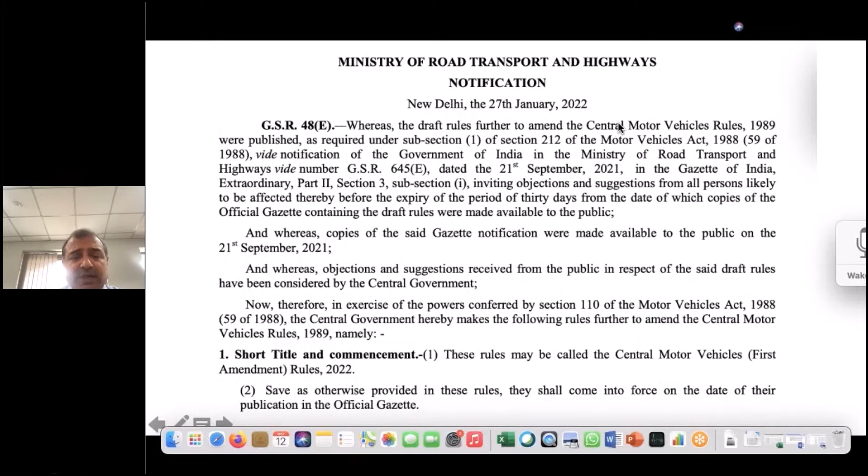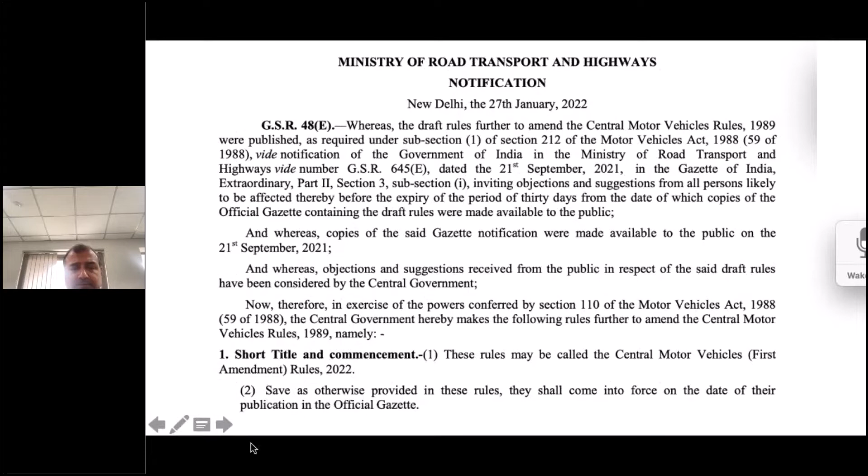So why we are here today is because of this notification, which came in on 27th of January 2022. It is the Gazette notification, an amendment in CMVR rules, known as the CMVR amendment rules 2022. If you read the Gazette notification, paragraph 2A talks about the implementation of AIS 135 in type 3 buses. Similarly, the amendment in rule 2B is with respect to AIS 063, which is basically the school buses.

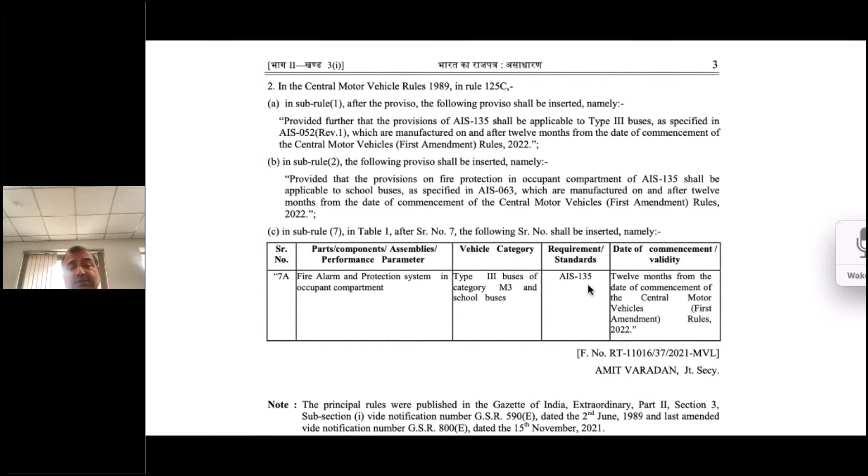And the table makes it amply clear: fire alarm and fire protection system in occupant compartment, type 3 buses of category M3 and school buses. The applicable standard is AIS 135, and the time period given is 12 months, which will be ending in January 2023. So we expect implementation in January 23. That is the current position. How we came to this position and what various aspects we studied.

So on one hand, we should be removing those aspects which impact the buses in their operation, and at the same time, incorporate new measures so that the risk and the hazard is managed. In my presentation I'll be concentrating primarily on buses, and whenever I say occupant compartment, you can also consider it as passenger compartment, because these two terms have been used interchangeably, although the standard uses occupant compartment.

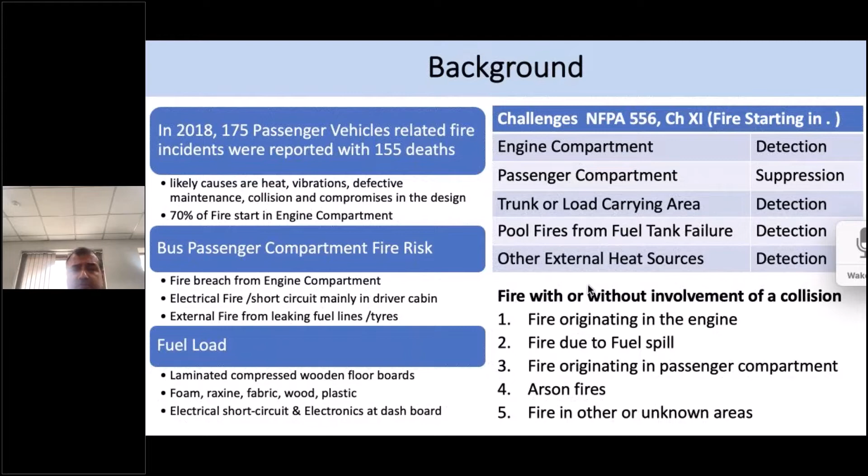Okay, so if you look closely, until 2020, when we started working on this problem, school buses were already slated to introduce FDSS and FDAS: FDAS from 1st April 19, and FDSS from 1st April 20. These two, FDAS and FDSS, were part of AIS 135, which only covered the engine compartment. So the majority of fires originating in the bus were tackled through FDAS and FDSS, and this was implemented in school buses primarily.

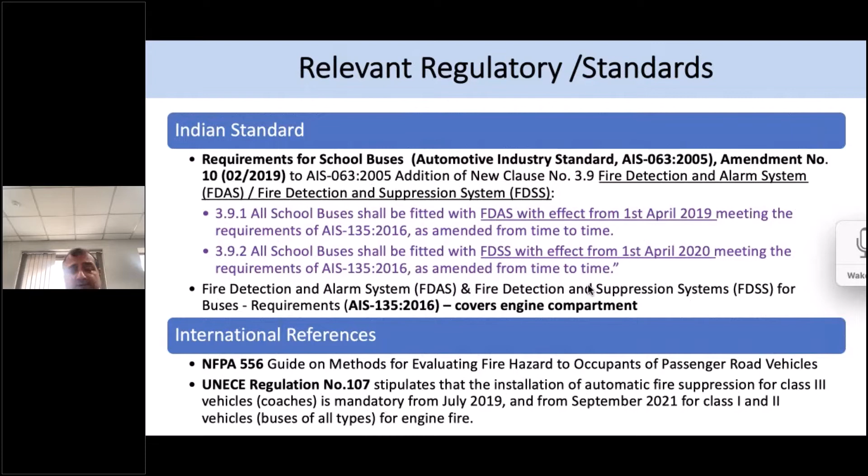If you look at international references, similar guidance can be found in UNECE Regulation 107, which also talks about engine fire. And the guide we referred to for most of our referencing purposes, the guide on methods for evaluating fire hazard to occupants of passenger road vehicles, is NFPA 556. So I would encourage the participants who are interested to look at it and go for more holistic solutions in bus fire.

Okay, so just to tell those who have not been very conversant with fire risk management, there is a passive approach and then there is an active approach. So in the passive approach, we already have a lot of elements in place. There is a firewall between engine and passenger compartment. Then there are restrictions or regulations with regard to the materials which you use, with regard to flame retardancy. And then there is a possibility of using fire blankets. So these are all passive approaches which become part of the complete solution.

So if you look at the progression, the passive approach comes first, then detection, followed by suppression. In that sequence, we still have a lot of work to do on addressing the fire risk in buses using the passive approach. In my understanding, there is still a lot of scope for studies on materials, the choice of materials we pick for the passenger compartment and other fire sensitive areas in a bus.

Then the second line of defense could be our detection system. So the more robust our detection system... and we should always be aware that the passenger compartment is a manned area. So all our efforts should keep that element in mind.

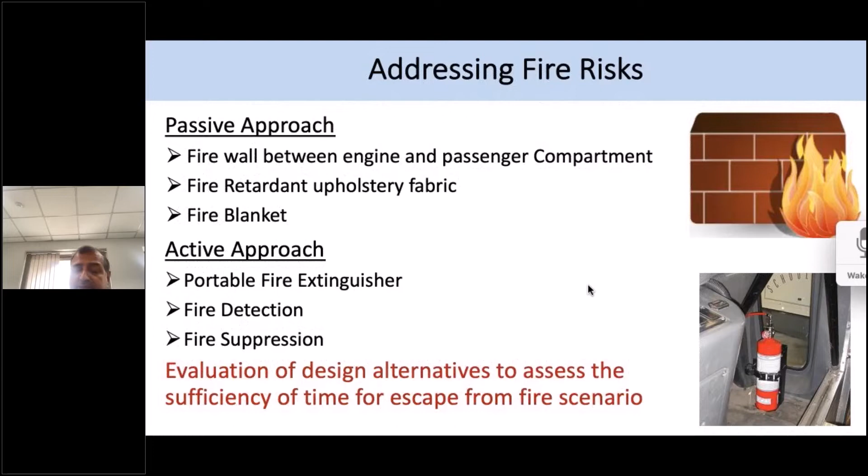A pre-burn time of 60 seconds was given in these experiments, and the temperatures achieved were recorded using thermocouples, and heat flux sensors were also used to measure the heat flux. Both these parameters were compared with the simulation using PyroSim. Subsequent to the passenger compartment fire, we also studied additional external fires from the fuel tank as well as from the braking system.

The system was evaluated and compared, and we found that the system is effective in blocking the entry of fire effluents, smoke and hot gases into the passenger compartment. That is one. The second thing is it immediately lowers the temperature in the passenger compartment, providing a window to the passengers. So it is still effective; although it's not able to suppress the fire if it is externally originated, it is able to provide the window, meeting the objective of the system.

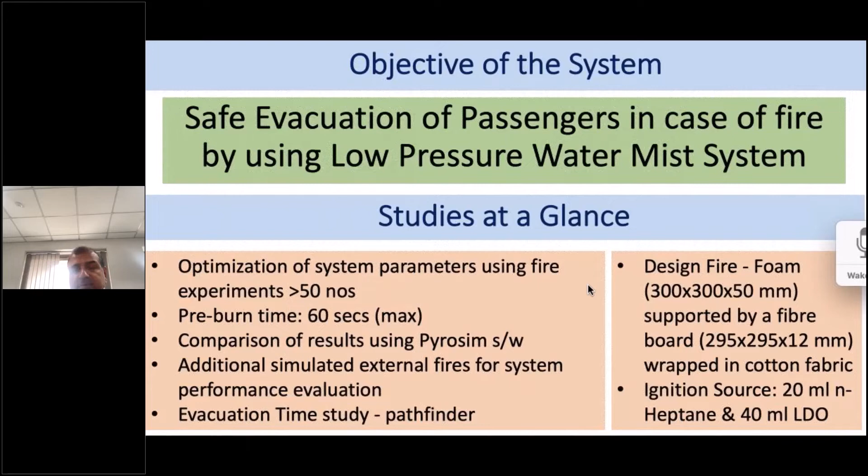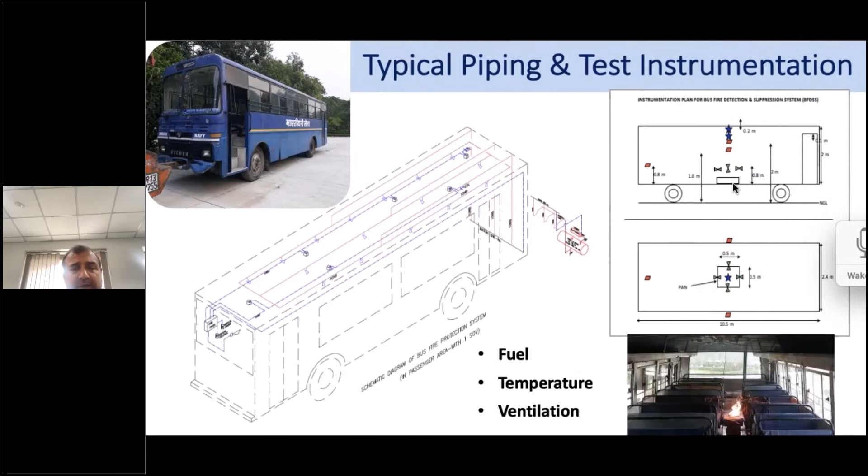But there had been other studies when the fire was created on top of the seats. So there had been different places where the fire was created, and on the left side there is a picture of the bus which was used in these experiments. The same bus was also mapped through a 3D design to PyroSim, where this setup was created. The length, width, and height is of a standard bus.

The seating material involved combustible polymeric mass and cellulosic mass. And you can get an idea that the typical weight of the polymeric combustible is about 40 to 50 kg, weight of cellulosic combustible is 5 to 10 kg, and exposed surface area of combustible was 10 square meters.

There were 3 scenarios of probable fire types generated: passenger compartment fire, engine compartment fire, and external fire, tire fire, and oil tank fire. These scenarios were created to understand the impact of fire and then the impact of mist on the fire, how the smoke layer is getting cooled, how the overall temperature in the compartment is rising over a period of time.

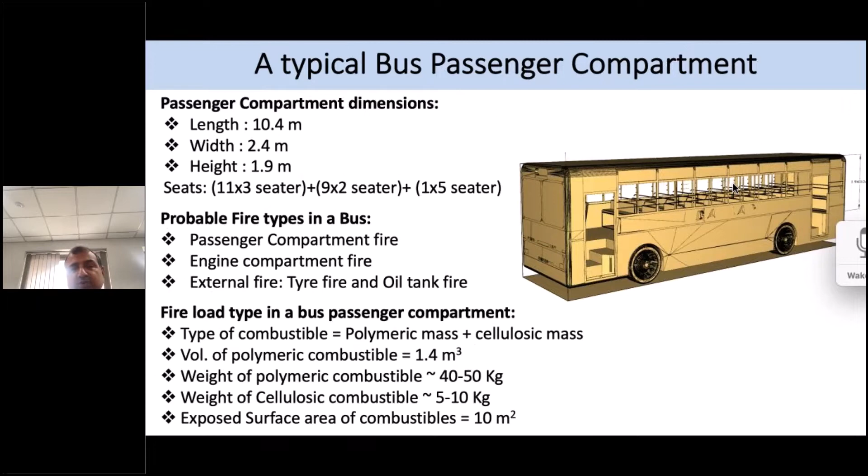So these studies were carried out to come to an understanding that there could be a system that can be used for meeting the objective which we initially set, that is providing an evacuation window in case of a fire, irrespective of the origin of the fire. So that is the brief background.

I'll now quickly move on to the AIS 135 amendment. Once we carried out all the experiments, there had been engagement with the stakeholders from the regulators, the OEMs, the fire safety professionals, and I'm thankful to them for coming on board; that was in 2021. For 6 to 7 months, we were constantly working on this aspect and finalized the other parts.

So AIS 135 was upgraded, or basically additional parts were added to it to cover the passenger compartment, which the standard calls occupant compartment. Part 1 and part 2 were dealing with the engine compartment; part 3 and part 4 have been introduced for the fire alarm system, part 3, and fire protection system, part 4.

I'll quickly go through some of the provisions and test requirements from the standard. Since the standard is voluminous, I will not be able to completely cover the amendment in my presentation. So I would encourage you to look at the amendment itself and go through it. And if you have any queries, then we can discuss it further.

So the amendment was with respect to incorporation of occupant compartment fires. The enhanced scope now includes requirements of fire alarm system for bus occupant compartment, and annexes related to FAS approval, 1A, 3A, 4A, and 6A. Then we have part 4, which is approval of requirements of bus occupant fire protection system, and annexes related to FPS approval, 2A, 3A, 5A, and 7A.

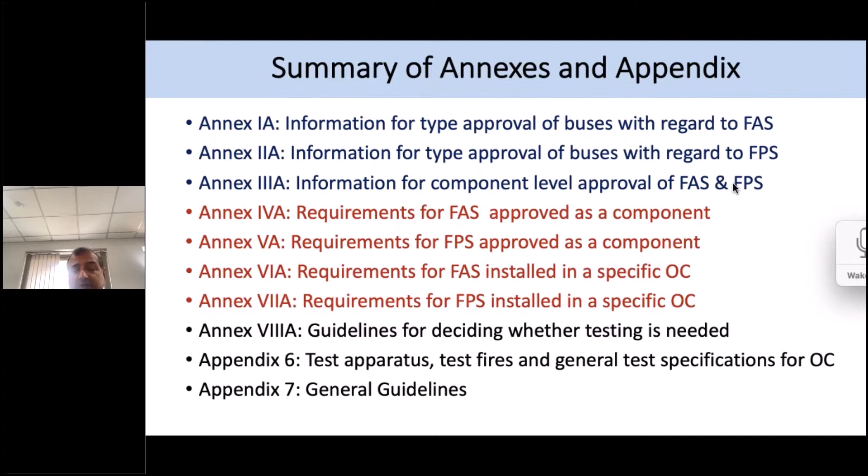So the emphasis on AIS 135 is potential fire hazard. So there is a fire risk assessment which needs to be carried out.

You will agree with me that buses come in various different shapes and sizes, and they also come with different materials which are there inside the occupant compartment. So it is important that we carry out any activity of installation based on the risk assessment, and some indication of risk assessment is given in the standard. The basis for installation of fire alarm system and fire protection system should be based on the fire risk assessment within the occupant compartment to make it effective.

So one clause talks about within the occupant compartment the potential fire hazards to be identified, and the fire detectors shall be positioned appropriately to cover the fire hazard.

So if you look at the fire detectors, we have a choice of fire detectors. In our study we used smoke detectors, but when we discussed with other stakeholders, although we also used heat detectors and linear thermal detectors, we realized that the trigger time for all these detectors other than the smoke detector was very high. So although the technology is very simple, it is prone to a lot of false alarms.

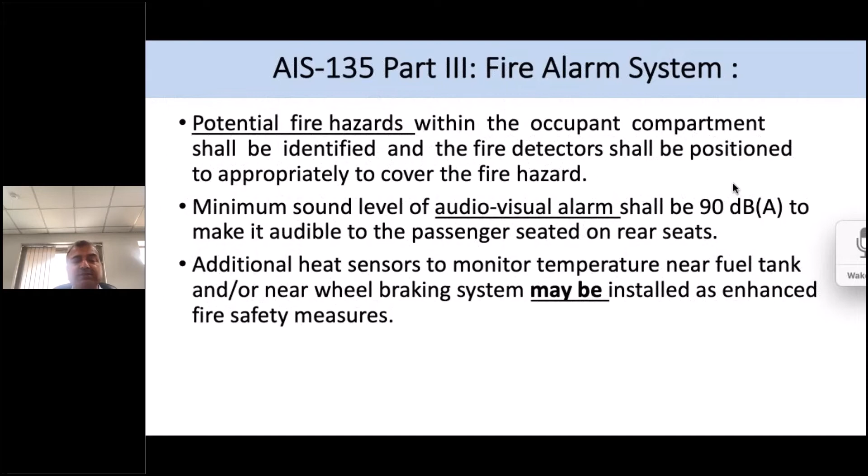Many times if the fire remains undetected and is away from the passenger compartment, it becomes large enough to be noticed either by passersby or by the occupants. To eliminate that possibility and get the detection as early as possible, these provisions are possible, but this is not a mandatory requirement. These are additional requirements suggested to increase the fire safety in the bus.

If you look at annex components, the fire shall be detected and warning signal shall be activated within 30 seconds after ignition of the test fire 8. Test fire 8 is very similar to the fire we used in our experiments, which involved the fiber board, the foam, and the cotton wrap with the LDO and heptane. The same fire has been described, and the effort of the team involved in the standard making was to make it cohesively gel with the FDSS and FDAS provisions.

These requirements are from the perspective of smoke detectors, but these can be altered if different kinds of detectors are being used.

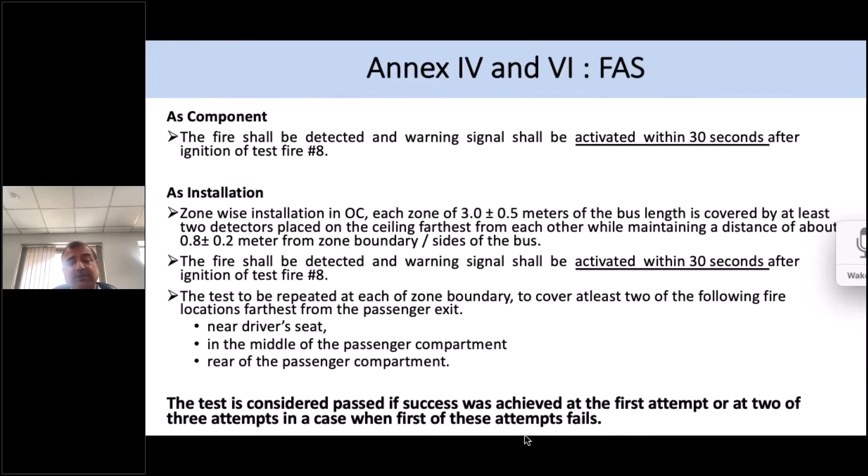The time for activation remains the same, 30 seconds, and the test is to be repeated at each zone boundary to cover at least 2 of the following fire locations farthest from the passenger exit: near the driver seat, in the middle of the passenger compartment, or rear of the passenger compartment. These scenarios are to cover maximum coverage of detectors. The test is considered passed if success was achieved in the first attempt, or at least two of three attempts. So if the first attempt fails but the next two pass, the test is considered passed. This is the provision for the fire alarm system.

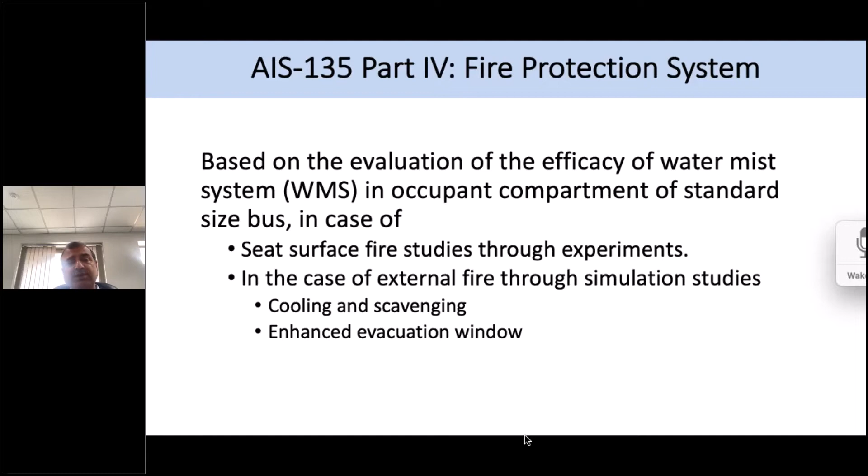If you look at part 4, as I told you earlier, based on the evaluation of efficacy of water mist system in the occupant compartment of a standard size bus, in case of seat fire these studies were carried out through experiments, and in case of external fire through simulation studies, which led to cooling and scavenging of gases and enhanced evacuation window. So part 4 was formulated on this basis, and the provisions are made such that the design details are already incorporated in the standard.

So to a large extent, the effort is not required to carry out a lot of calculations, but there are engineering aspects which need to be tackled. If you look at it, it also starts with documentation of fire risk in the occupant compartment. There can be a single fire risk assessment study of a bus, based on which the alarm system as well as the fire protection system can be configured, and enough flexibility is there in the standard to incorporate these aspects.

So if you look at the documentation, it must cater for the total quantity of class A fire source which is there and how it is spread out in the compartment. If it is studied carefully along with the heat source, then there is a higher probability that we will be able to achieve the objective of evacuation. The identification of surfaces where temperature may reach above 80 degrees.

So in normal operation, if there is no fire protection system, temperatures near the engine due to auto ignition of various gases can reach more than 80 degrees, or there can be gases or substances in contact with the surfaces. So the barrier between the engine and occupant compartment, or junction boxes, or locations with a lot of electrical connections or joints with high voltage and high current, or hoses and containers with flammable liquids beneath the bus, or a possibility of pressurized gas.

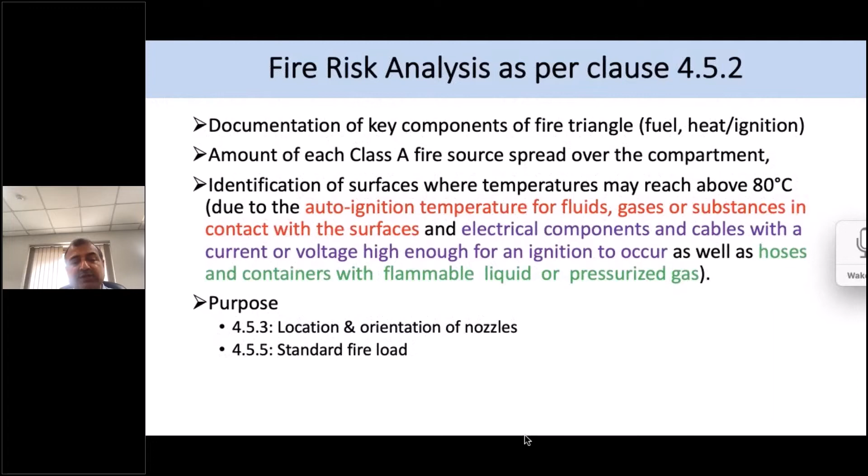Sometimes we find that. If you look at design clause 4.5.5, ease of implementation and reduced ambiguity was the objective. The design basis of FPS for the water mist system was 0.65 liters per minute per meter cube mist injection rate, which is the total aggregate mist injection rate from all the nozzles. The seating capacity has been used as an indication of standard fire load.

So when we were formulating this standard, there was a discussion on whether we can use it for all buses. We realized there is a definite fire load beyond which this will not be very effective and may not be of use, so there has to be further studies on those cases. So a standard fire load, then a seating capacity versus a volume - there may be coaches with fewer seats but the same volume. That will not be covered in this particular standard.

So the table for gross volume range and number of nozzles is more prescriptive in nature, 9 to 35 with enough flexibility, with water quantity ranging from 55 liters to 210 liters.

I'll be talking about that in a subsequent slide.

Volume up to 80 meter cube was subdivided into 7 ranges, and the gross volume range of the OC shall be arrived at without subtracting the volume of installed components, seats, etc. from it. The design features are applicable to the standard bus of volume and seat matrix up to 80 meter cube. Buses having special comfort arrangements or sub-compartments in occupant area shall be subject to simulated fire test as per Appendix 6.

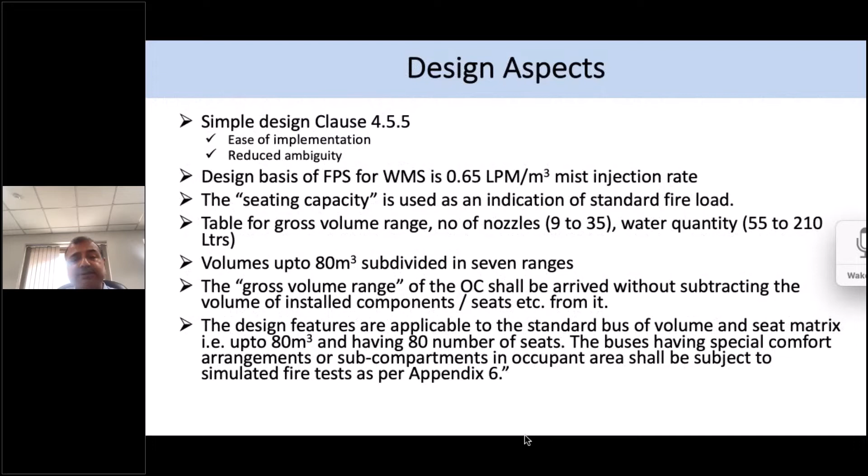This primarily gives a way out to handle those scenarios. It suggests going for a simulated fire test, but there could be further discussion needed as cases evolve or as we have the case in hand. So this is clause 4.5.5.

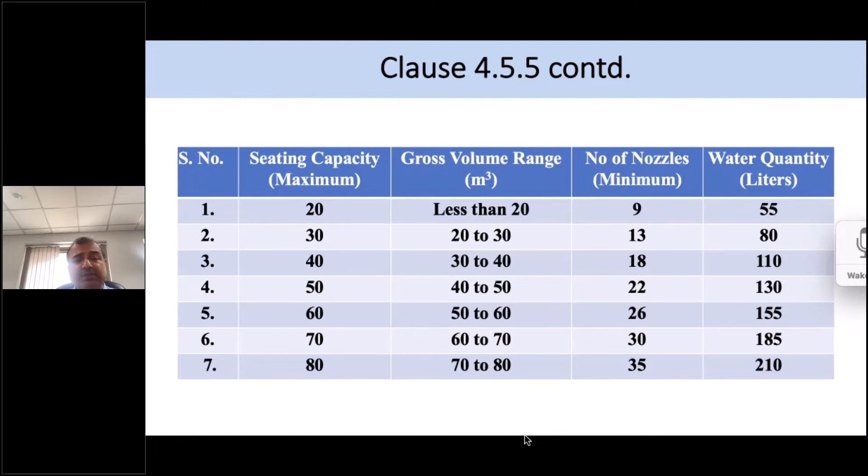It talks about seating capacity, gross volume range, the number of nozzles, and the water quantity. If we use this table, we will be able to achieve the requirement of 0.65 liters per minute per meter cube, which is the mist injection rate that the design basis allows us to achieve. But if we look at this table, if we are talking about a seating or sleeping capacity of 30, and a volume of maybe 50 meter cube, then this standard is definitely not applicable.

Clause 4.5.6 and 4.5.7 talk about the propellant air. The pressure of the air at the discharge point should be enough to create 8 plus minus 1 bar with the water in the pipeline, and nozzle characteristics have been determined at 7 bar. These are the nozzle characteristics, and there is enough flexibility.

With the droplet sizes as well as the cone angle and the nozzle flow rates, this becomes more performance-based than a fixed standard.

In the nozzle spacing, there is a recommendation. The total discharge time should not be less than 3 minutes. This is an area I'll talk about in testing, so this will be part of it.

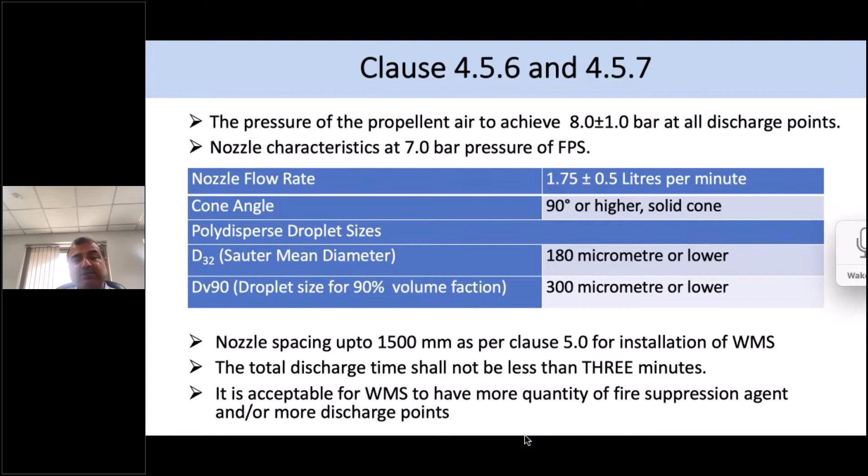It is acceptable for a water mist system to have more quantity of fire suppression agent and more discharge points. Again, there is a possibility of risk assessment or adjusting these elements, but it should be based on a fire risk assessment of the bus, and should not be blindly more or less. Otherwise, it should stick to the requirement of the standard.

Installation requirements: discharge points along the length of the bus should angle downwards to provide wet coverage to the window and seats located just below. All these points are guidelines for installation, and the objective is that the water mist is uniformly spread in the total compartment.

The material of construction should be SS 304 or better, because we are dealing with water, and if the water stays for long, there could be a possibility of corrosion and maybe leakages, so system reliability will be at stake. We consider SS 304 or better if there are better options available.

This should be explored in 3 different headers. When we experimented, we tried 2 headers and 3 headers, and we realized that the 3-header configuration is the best, primarily because of the curvature or nature of the roof of the bus. There is a mid section which extends beyond the side sections, and because of that there is a requirement to have a mid section to cool down the smoke layer which may accumulate in the passenger compartment.

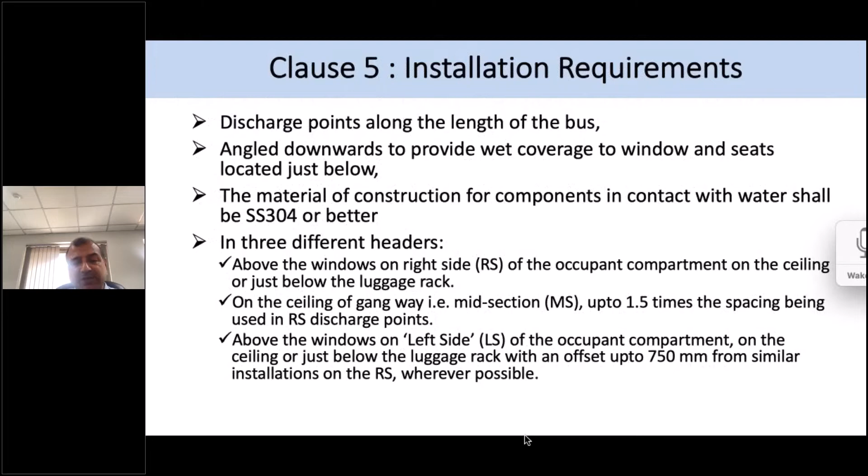The 3 different headers and some spacing-related details are also given, but these are recommendatory, not specific that we should stick to. This depends upon the length of the bus and the geometry and details inside the bus. We can work on this aspect along with the fire risk assessment. We must always keep fire risk assessment as the basis for any alteration from the standard.

If we go for the standard design and a standard bus with a given seating capacity, the standard specifies nozzles on the right side, middle section, and left side, and the network should be installed in such a way that there is no accumulation when it is not functional. The pipe work should be hydrostatically tested and performance documented for review by the approval agency.

This is again one of the elements of testing the system: hydrostatic testing.

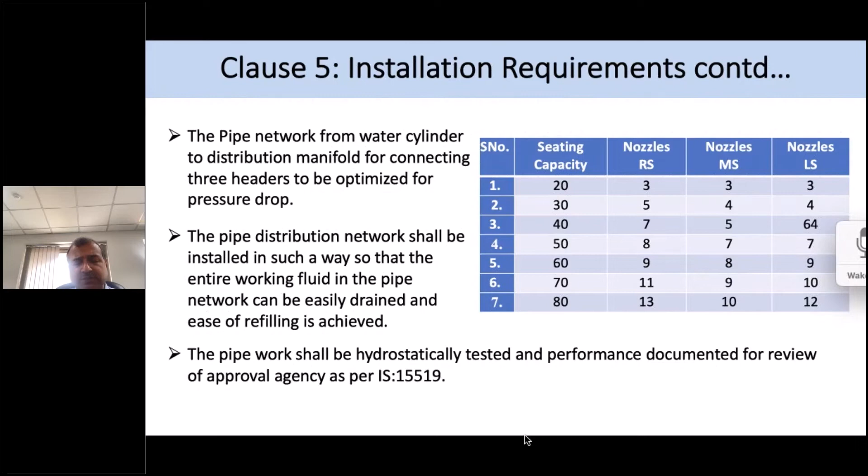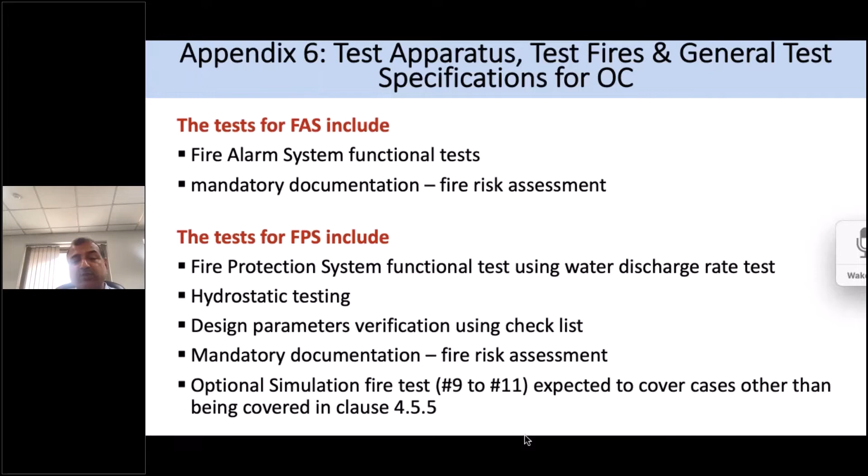The test for fire protection system include fire protection system functional test using water discharge rate test, hydrostatic testing, design parameter verification using checklist, mandatory documentation, which is fire risk assessment again from the perspective of FPS, and then there is one from the perspective of fire alarm system. An optional simulation fire test 9 to 11 expected to cover cases other than being covered in clause 4.5.5. So this is the checklist which we finalized in the standard.

So air quantity, what should be the criteria? Air cylinder capacity. So then what should be the test pressure? 1.5 times of the operational pressure. Then pressure reducing valve, how it should be able to reduce the pressure from the air cylinder to the desired pressure in the water tank, water cylinder.

Then solenoid valve, so that it can be remotely operated from the driver's cabin, and then water cylinder capacity, pressure, test pressure, nozzle characteristics we already talked about, which included flow rate, Sauter mean diameter, and the Dv90. Then total nozzle layout, again it refers to the clause.

Pipe network pressure optimization. Again, this is a very important aspect, that when we work on a piping network, we should be able to optimize the pressure in such a way that the minimum pressure of 7 bar is achievable at the nozzle, or 8 plus minus 1 bar is achievable at all points. Pipe and fitting materials and types, relevant standards.

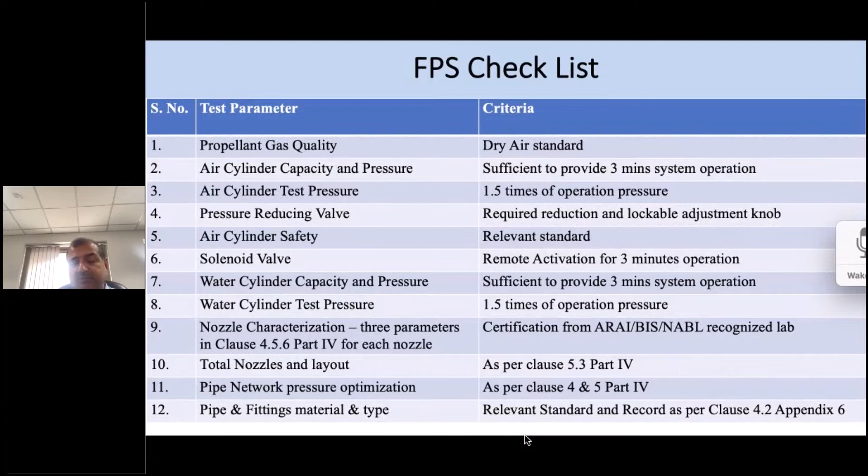So there is an IS standard for the water mist system, and all the other relevant aspects should be picked up from there. General guidelines we talked about in the standard. Component selection. So how do we select a component so that it is reliable? Then documentation. What kind of operational documentation, maintenance documentation, FAQs we should have for the system. Maintenance requirements.

Different kinds of maintenance. The maintenance when system is not operated, but from time to time. So these are periodic maintenance. Then there are breakdown maintenance. So it mentions all these elements. And you must be aware that this is my last line of safety.

If you look at the passenger compartment, this is a manned area which I already talked about, and then there are onboard fire extinguishers, portable fire extinguishers available. So any sophisticated system will not work if the people who are operating it are not aware about it. So the first line of defense is basically their extinguishers, where in any case of alarm they should be able to handle and suppress the fire at its earliest stage, possibly at the incipient stage, but as soon as possible.

And then subsequently, if the fire goes out of hand, there is a requirement to lower down the temperature, then the system should be operated. So this definitely requires involvement of the drivers and the co-drivers at large for making it effective. So a special emphasis, in my view, should be given on this aspect, so that this system remains functional during the lifetime of the bus, and the upkeep and maintenance is done in a timely fashion.

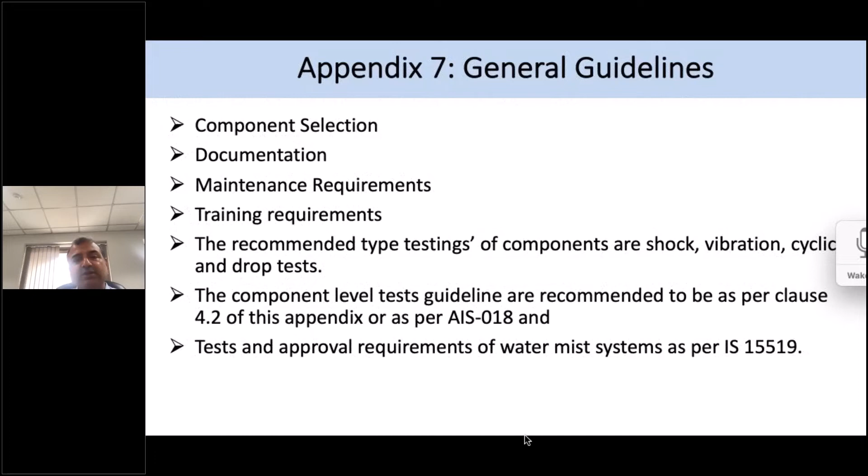So this is the gist of the standard. I did not cover everything due to lack of time because it's an extensive standard. So I covered the salient part of the standard. And you must be aware that this is one step towards a performance-based system. So I do not see that this is the end of the work in this area, and I hope and expect that the other agencies will also join in and work on this further.

We did simply, and there is a need for further work on this, that we have established fire safety goals and objectives for bus, and then we analyze the fire scenarios, and these scenarios can be more realistic if we have data from the ground. So as we were talking about earlier in the slide, for 2018 data that comes from the Crime Record Bureau, this information can hardly be used because the origin of fire and other details are not available. So if there is data collection on this aspect, there can be more realistic studies and prioritization

of activities. Then quantitative assessment of design alternatives against the fire safety goals and objectives using accepted engineering tools, methodologies, and performance criteria. And engineering tools also involve the simulation tools which we have. Then analysis and design process will involve fire growth modeling and testing of final designs, fire hazard control, and fire properties of materials.

So this is another area I would like to emphasize, which is the last point about the materials. As of date, at least I am not aware of a comprehensive tracking of these materials for their heat release rate, ignitability, and if there are norms, those are loosely bound. So we might like to look at this aspect more closely, so that we have our first line related to materials, the second line which is fire extinguishers, and third is the fire protection system. So in that aspect we can give higher priority to quantify and have reasonable targets for fire properties of materials.

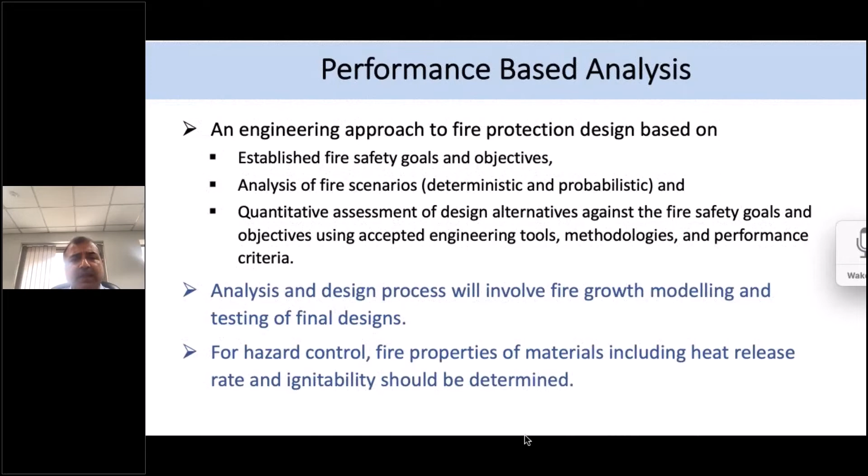And in conclusion, I will say that fire protection system complements fire extinguishers and passive fire protection measures. I have been repeating this part several times, and I expect that if there's one takeaway, it should be that fire protection system is complementary to fire extinguishers which are already there, and the passive protection measures which you have already incorporated. FPS enhances the evacuation window for the passenger, irrespective of where the fire is originating. Selection of reliable components needs to be addressed for implementation, and priority to bring out test protocols for FPS and FAS, so that there is more engagement of the industry on this element.

For the research institutions and other organizations, what could be the way ahead? Further studies on performance-based design approaches, which I talked about in the previous slide, industry participation for component-level reliability assessment, and addressing fire safety in vehicles with different types of fuels. We must be mindful that now there are different kinds of fuels being talked about, be it hydrogen, a mixture, liquid hydrogen, EVs, so there are a variety of fuels which we will be encountering in future. So how we can comprehensively deal with fire safety needs to be looked into.

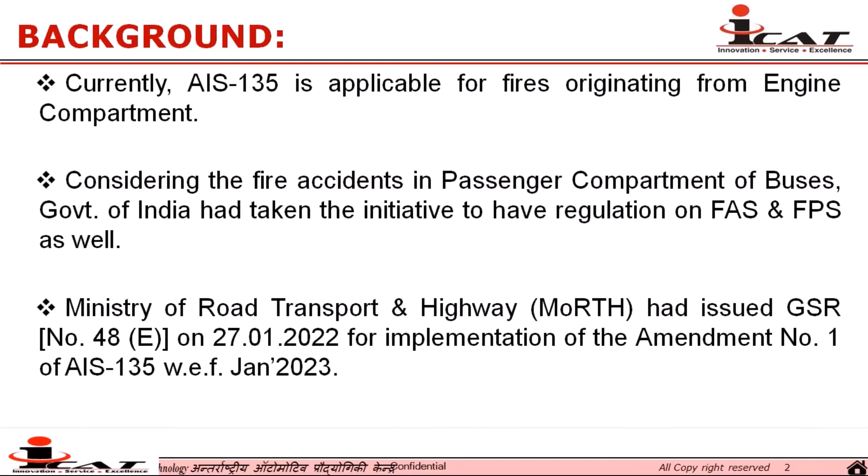Currently, AIS 135 is applicable for fires originating from the engine compartment. In this standard, there are two types of testing, FDAS and FDSS, which are conducted on a mock-up of the engine compartment for fire originating from the engine compartment. However, there are incidences where the source of fire is not the engine compartment. It is inside the passenger cabin due to a short circuit or some external sources. So, to detect or suppress this fire, there is currently no provision in terms of detection or protection.

So, considering the fire incidences in the passenger compartment of buses, the Government of India took the initiative to have regulation on FAS and FPS as well. In this regard, the Ministry of Road Transport and Highways issued GSR number 48 on 27 January 2022 for implementation of amendment number 1 to AIS 135, which will be effective from January 2023.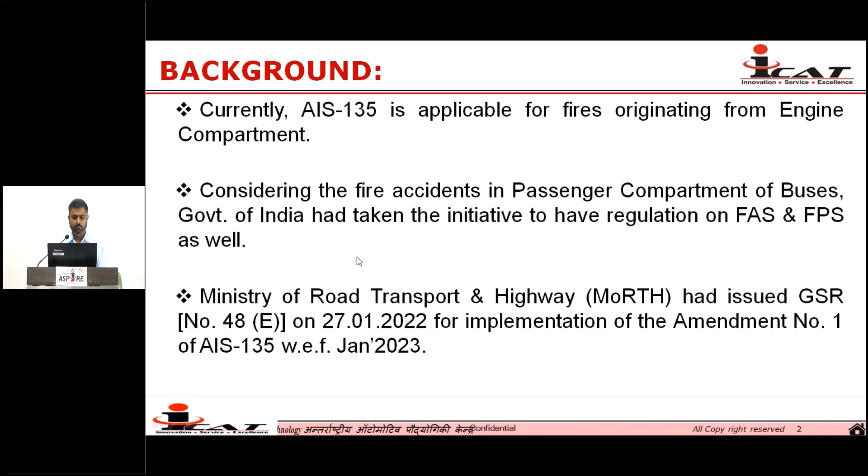So, you can see that these are the incidents of bus fire. This is the recent incident in Maharashtra's Nashik, where a bus caught fire. This incident is recent, on 8th of October. In this incident, a bus coming from Yavatmal to Mumbai collided with a truck which was going to Pune from Nashik earlier.

When I was preparing this PPT on Saturday, I got this information from the news that this bus caught fire in Maharashtra, so I have included this in this PPT. The main source of this fire was external in this case, due to the collision with a truck. In this incident, there are 12 casualties and 38 were injured.

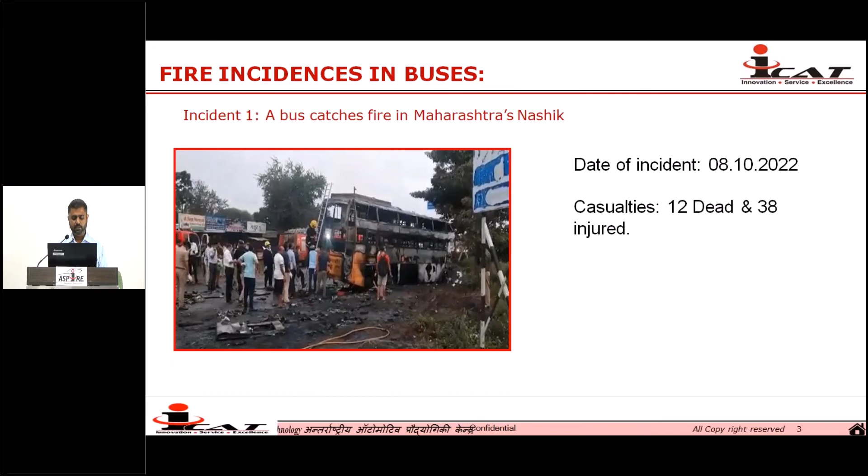Another incident was one school bus which caught fire in Navi Mumbai. This is also a very critical case, when the fire occurs in school buses, because this involves small children. Therefore, it is very critical to implement this standard.

In this incident, as many as 4 students of a school in CBD Belapur had a very narrow escape after the school bus that they were about to board at a pickup point in Kharghar suddenly caught fire. It was fortunate that all 4 students escaped from the bus before it caught fire. The main source of this incident was a short circuit in the front engine bonnet, so the main source was the engine compartment in this case also.

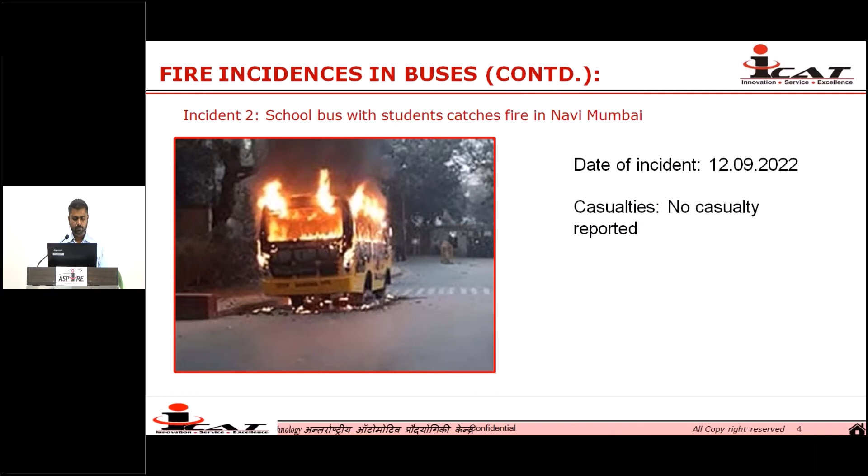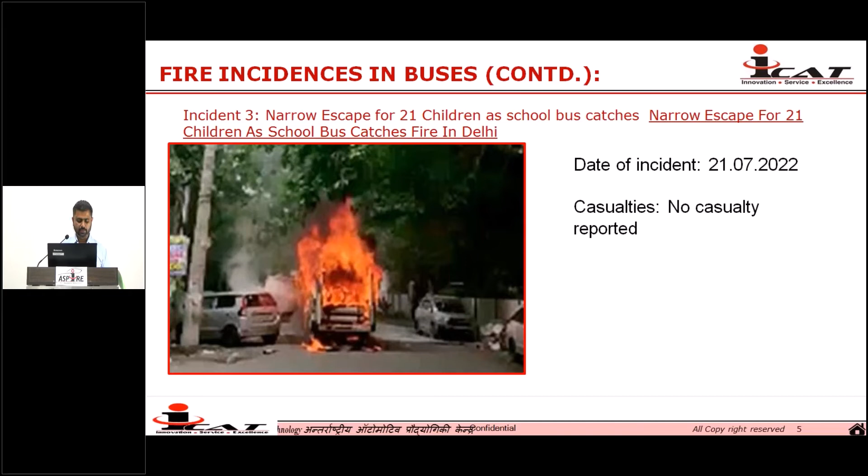This is the third incident. In this incident, 21 children were boarded on this bus, and this incident was of a school bus in Delhi. 21 children escaped from the bus just before the fire. This incident was in July 2022. No casualty was reported, but these 21 children had a very narrow escape after their school bus caught fire. In this case also, the source of fire was the engine compartment.

This is the fourth incident. The above 2 incidents are for school buses, and this incident is from a passenger bus. In this incident, the bus was on its way to Jammu from Katra when it caught fire near Kharmal, located about 1.5 kilometers from Katra. 4 pilgrims were charred to death, and 24 persons received burn injuries when a Jammu-bound bus caught fire near Nomai. This is a very unfortunate incident.

In this incident, when investigations happened, the source of fire was also the engine compartment. We can see that in all the incidents, the source of fire was the engine compartment, except one in which the source of fire was collision with the truck. On seeing all these incidents, it was good that the Ministry of Road Transport circulated the notification so that the bus passenger compartment is also included in the existing AIS standard.

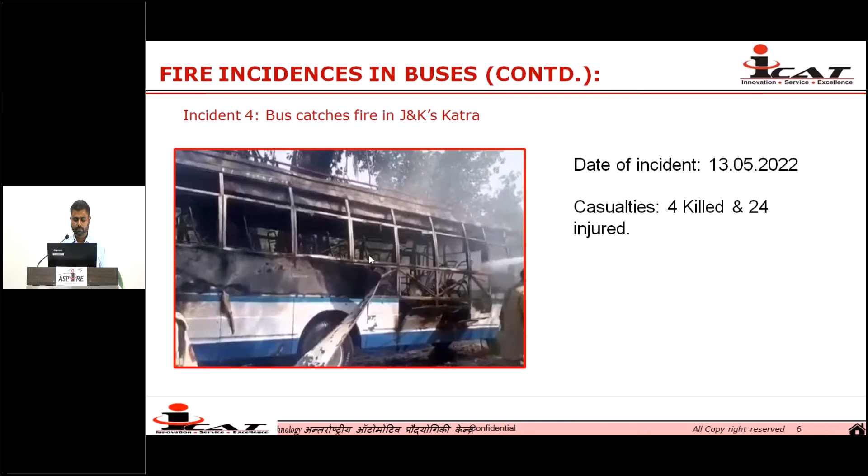These are the applicable test standards in India. Reference standard AIS 135 2016. This amendment number 1 is for FAS and FPS. The standard title is AIS 135 Fire Detection and Alarm System and Fire Detection and Suppression System. The applicable area is the passenger compartment of buses: type 3 buses of category M3 and school buses. As we have seen, two incidents are from school buses and 2 from long-distance passenger buses, so these 2 types of buses are included in this standard.

The notification came as per GSR 48 (E) dated 27 January 2022. As per this notification, this standard is applicable 1 year after the commencement of this notification, that is 27th January 2023.

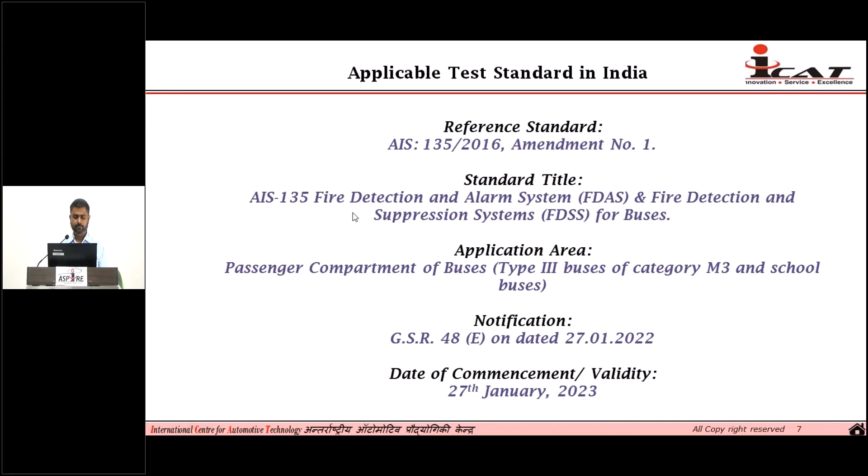So what are the main key features of this standard? Previously there were 2 types of testing, FDAS and FDSS. This is equivalent to that, but it is for the passenger compartment. FAS is the fire alarm system in the passenger compartment. This system comprises the components and subsystems required for automatically detecting fire, heat and smoke in the occupant compartment and initiating an automatic alarm.

So there are various types of detectors, but I have mentioned 3 of them, which are also mentioned in the standard. One is heat detector, second is smoke detector, and third one is carbon monoxide detector. So heat detector is a sensor that senses either abnormally high temperature or rate of temperature rise or both, coupled with a smoke detector.

And this smoke detector is a sensor that senses the presence of significant amount of smoke as fire signature. And third one is carbon monoxide detector. Carbon monoxide detector or CO detector is a device that detects the presence of carbon monoxide gas as fire signature. So I have highlighted these 3 types of detectors, but other detectors can be used with this FAS system, like UV and any advanced detector that can be the advancement in this technology.

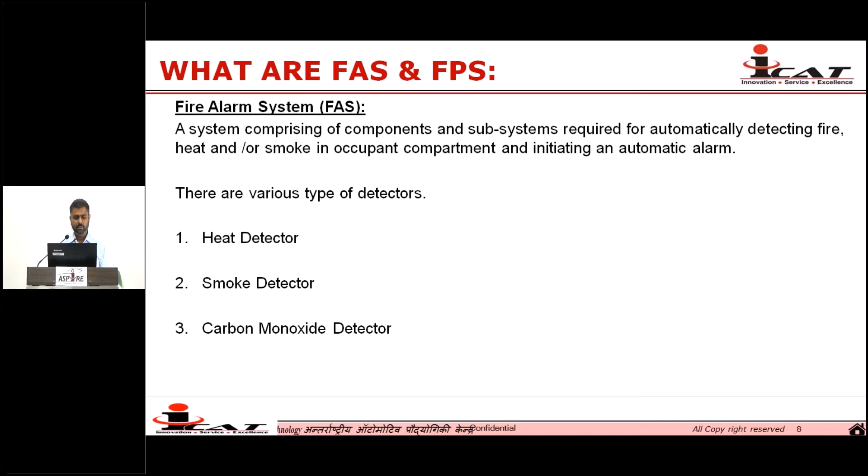And what is the fire protection system? This fire protection system is a low pressure system. As per the standard, low pressure means the pressure should be 12.1 bar or less, and it comprises the necessary elements to automatically trigger release of water mist with specific characteristics capable of suppressing the design fire in the occupant compartment, as well as controlling the temperature inside the occupant compartment when origin of fire is not the occupant compartment, to provide at least 3 minutes of evacuation window to the occupant compartment.

And what is this water mist system? A distribution system which is connected to a gas cylinder as atomizing media through a suitable number of nozzles which are capable of delivering the water mist that meets the performance requirement of this system. So in this water mist system, small droplets are generated, because the small droplets give higher heat capacity. So it is recommended in the standard.

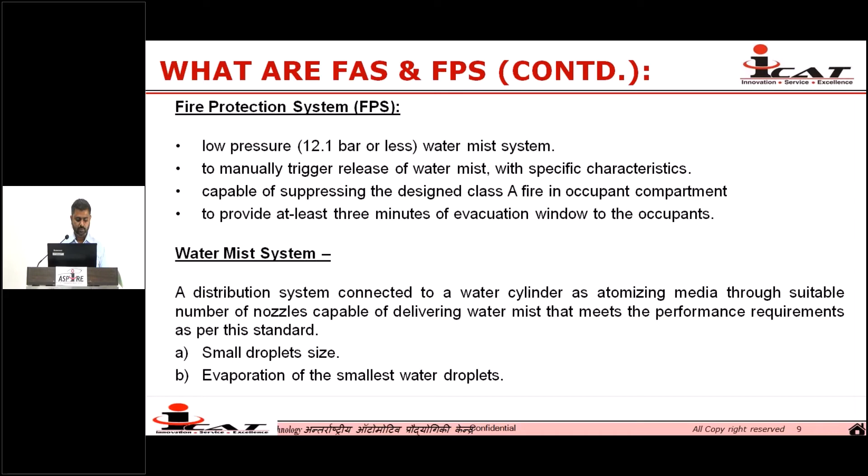There are more than 6 general requirements for FAS and more than 9 for FPS in the standard, but I am highlighting a few of them in this presentation, which I see as more critical. For a fire alarm system, the smoke or CO detector should have a dust compensation feature. Also this CO detector should conform to the relevant IS or UL and FM Global standard. So this we will check during the testing at ICAT.

And a minimum sound level of the audio-visual alarm shall be 90 dBA. This is to make it audible to the passenger seated on the rear seat of the bus. It should not happen that the sound does not reach the last seat of the bus. So this minimum dB level has been defined in this standard, and we will check this dB level during the testing.

Otherwise, optionally a hooter system as approved under AIS 52 revision 1 can be used with a minimum sound level of 90 dBA. That hooter may be common with the FDAS and FDSS, which was already approved at the time of FDAS and FDSS testing. So that can be used for FAS and FPS also.

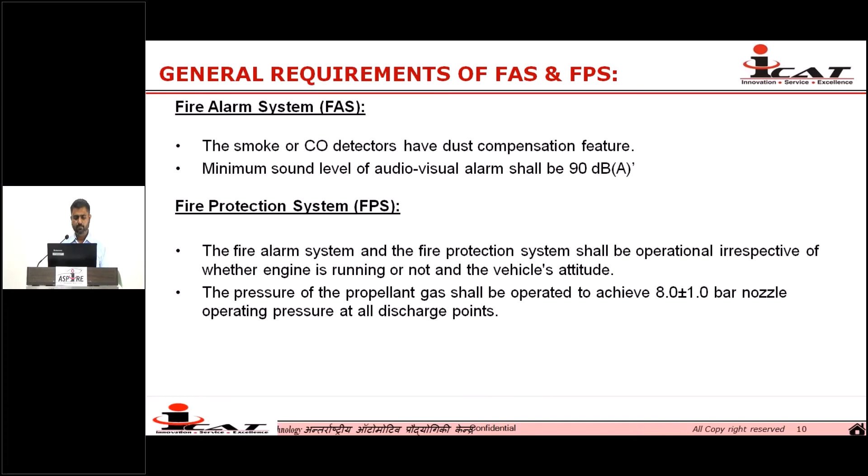These are the testing requirements, mandatory tests as per AIS 135. First is as per clause number 3, the FAS test, fire alarm system. I will not go in depth about this test. I will only highlight it because Satya sir has already described it in his lecture. So I will only go through it.

As per clause 4.1, evaluation test for FPS. In this test, there is a 12-point checklist. We will verify this checklist during the testing. And clause 4.2, hydrostatic testing. This testing will be done as per the hydrostatic test rig that we will develop at ICAT.

And clause 4.3, functional test of FPS. In this test, we are fabricating one mock-up for bus. So within that mock-up, we will do this FPS testing, and we will check the capacity of the fire, this FPS system, so that we will check 3 minutes of evacuation time.

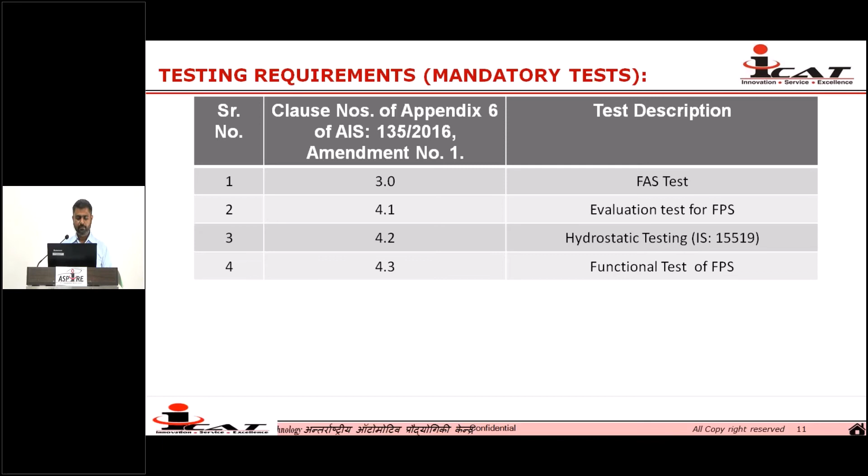There are other guideline tests in this standard, but these are guidelines which we will not test as mandatory ones; this is as per the manufacturer. They can do these tests. They have to ensure these tests before the actual testing. So this is as per 4.1 functional test, 4.2 sine sweep vibration and mechanical shock test. And another is

clause 4.3, high temperature test for electronic components and endurance test at high temperature for mechanical components, low temperature test for electronic and mechanical components, salt spray test for electronic components and salt spray test for mechanical components also. And endurance test at high humidity is there. Also drop test is there as an optional one.

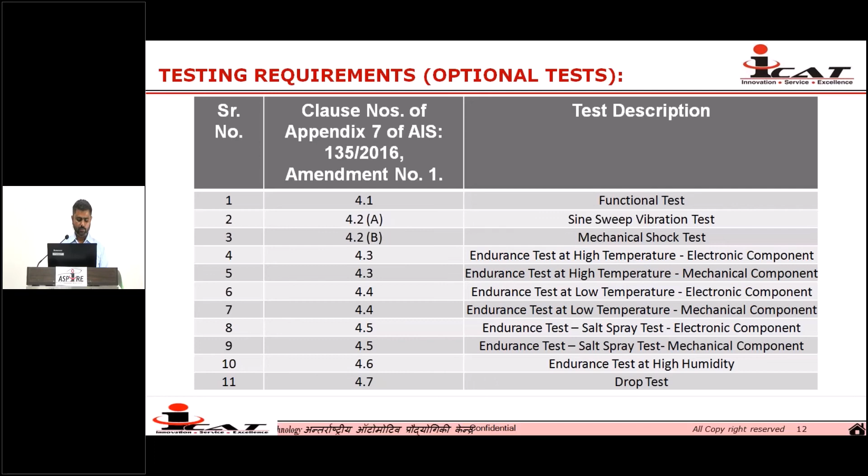So keeping in view this standard, ICAT is ready to do this testing. As per this standard, it is mentioned that these tests are done on the bus, but we are getting queries from some manufacturers because the cost of the bus is very high. So considering their request, ICAT management has decided that we will fabricate the mock-up itself in ICAT. On that mock-up, we will create the actual bus scenario, and as per that, we will do the FAS and FPS testing.

So this test setup we are fabricating is for FAS and FPS testing. This is the isometric view. You can see on the right side the actual photograph of the setup, which is under progress. In this setup, we can adjust the height, length, and width of the mock-up as per the actual bus sizes that the manufacturer will define in their checklist. As per that, we will do the setup before the actual testing, and this setup will be ready by November 2022.

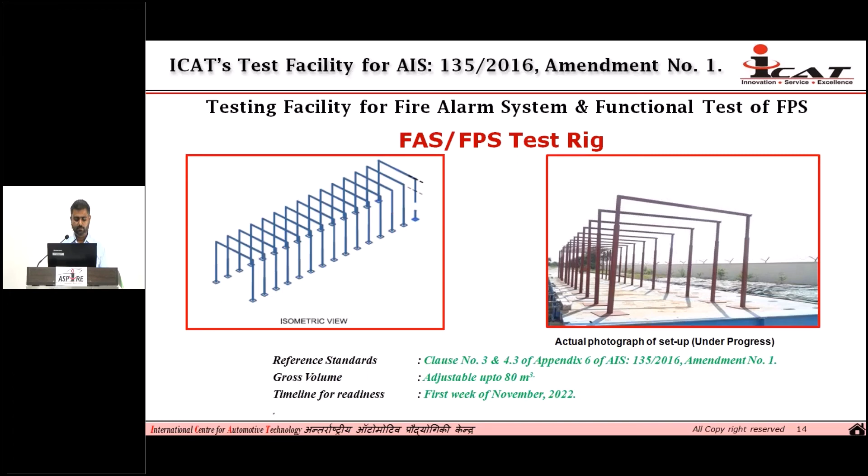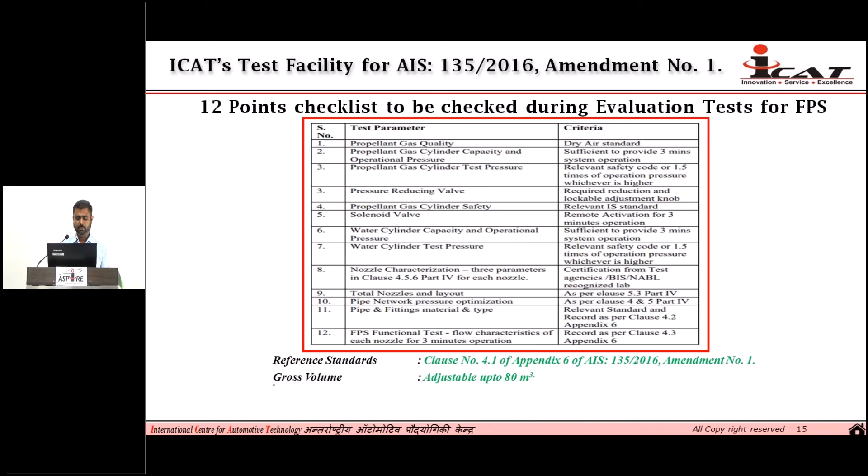This is the 12-point checklist. The checklist criteria are mentioned, and all the criteria are as per global standards. Some criteria we will check during the mandatory testing, but for other criteria, the manufacturer has to provide the IS standard report as per BIS or NABL standard. So other parameters we will verify as per the documentation.

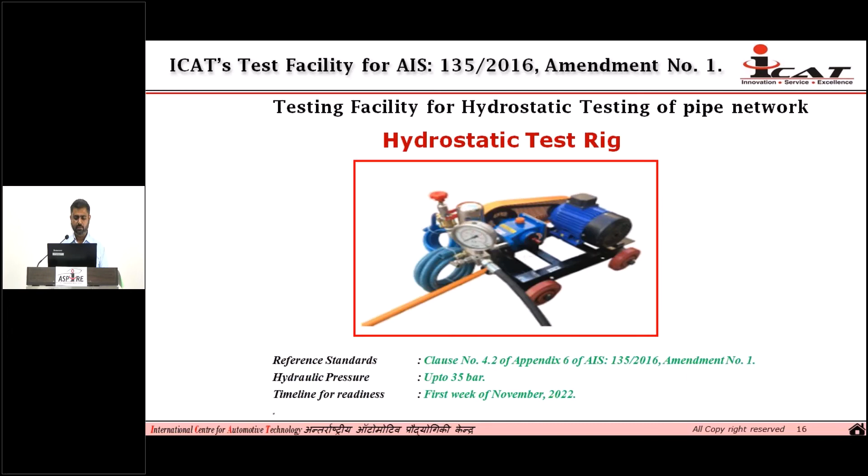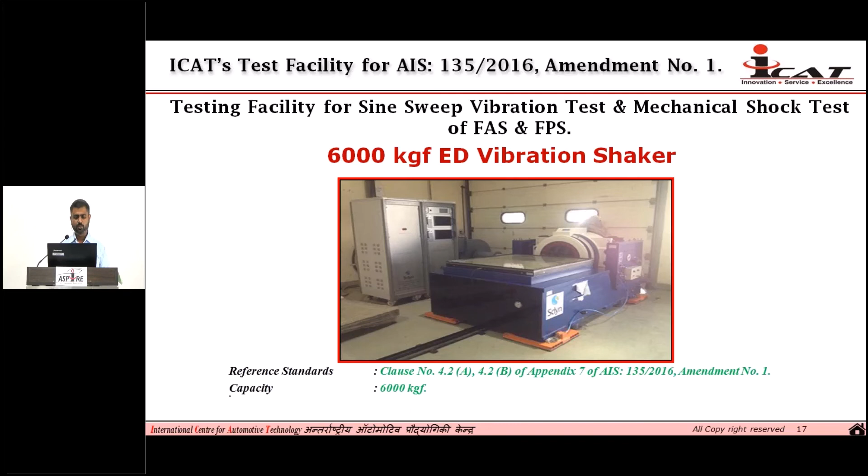Apart from the above mandatory testing, there are several other tests mentioned in the standard. Those are guideline tests, and ICAT already has these facilities. For sine sweep vibration test and mechanical shock test, we have a 6-ton ED vibration shaker. We can do vibration testing on this shaker.

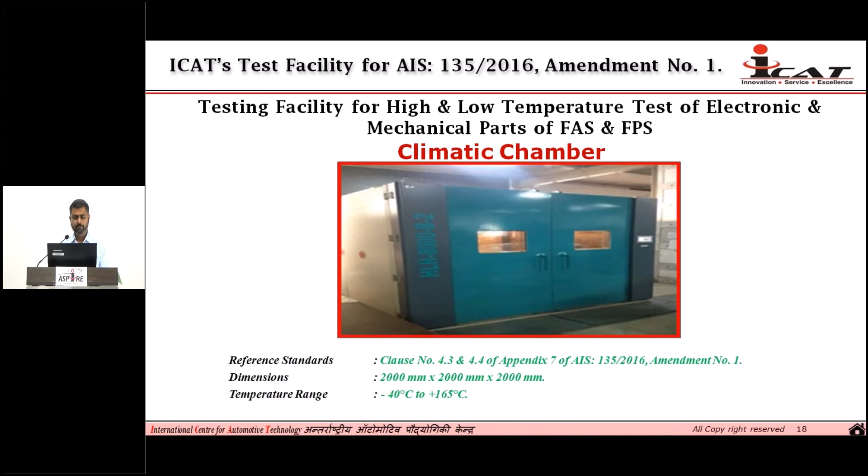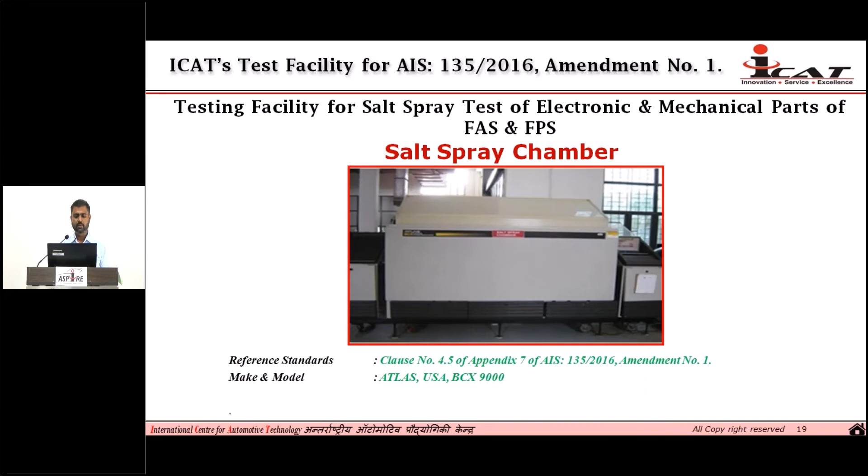For testing high and low temperature of electronic and mechanical parts, we have a climatic chamber. We can do all high and low temperature testing in this climatic chamber. And this is the salt spray test. We can do the salt spray test of electronic and mechanical parts of FAS and FPS with this salt spray chamber.

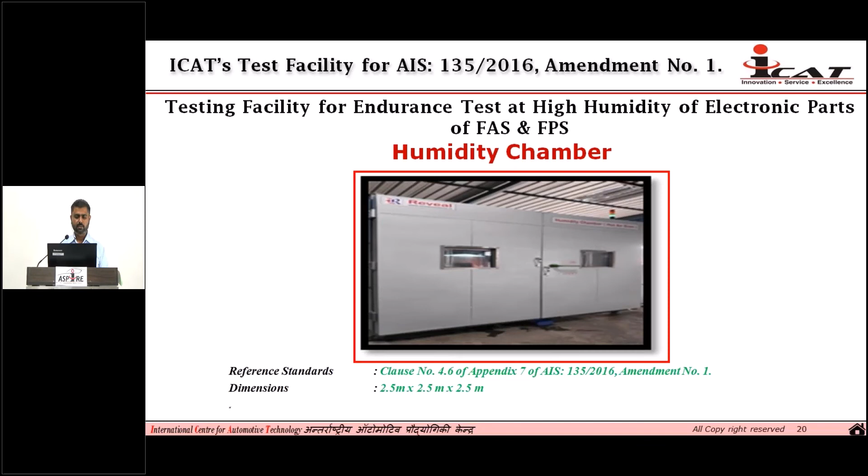This is a testing facility for the high humidity endurance test of electronic parts. We can use this humidity chamber. Seeing the size of these components, including mechanical and electronic parts, we have this testing facility available. We can do this humidity testing in this chamber.

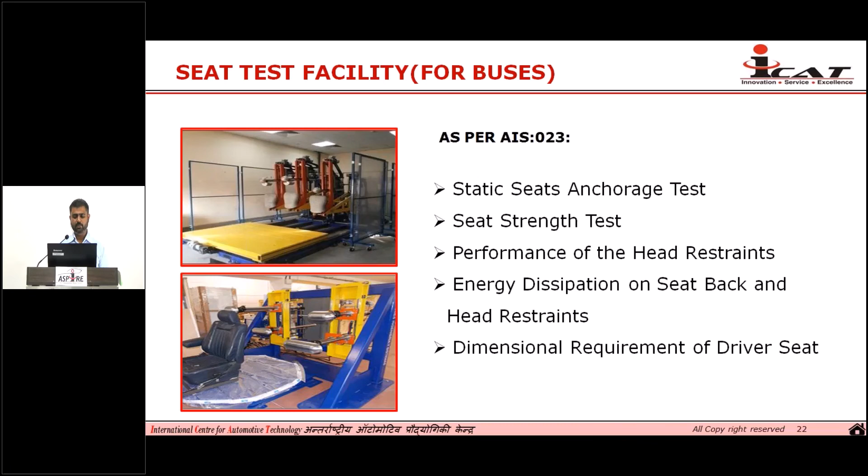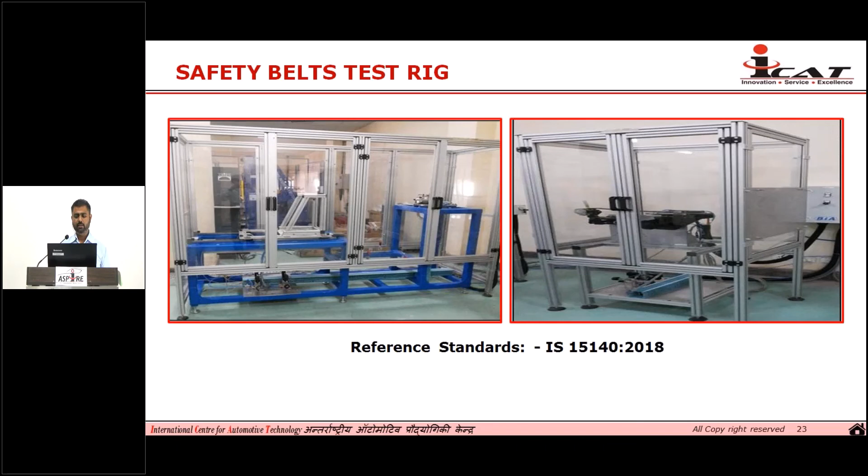These are safety belt testing. It is not mandatory for buses, but it is for all M and N category. So I have included this in future if some standard is applicable for safety belt also for driver and co-driver. We already have this safety belt testing facility available with us, so we can do the safety belt testing. We have emergency locking retractor and a retractor durability test rig, another type of 6-station retractor durability test rig, and retraction and extraction force measurement test rig.

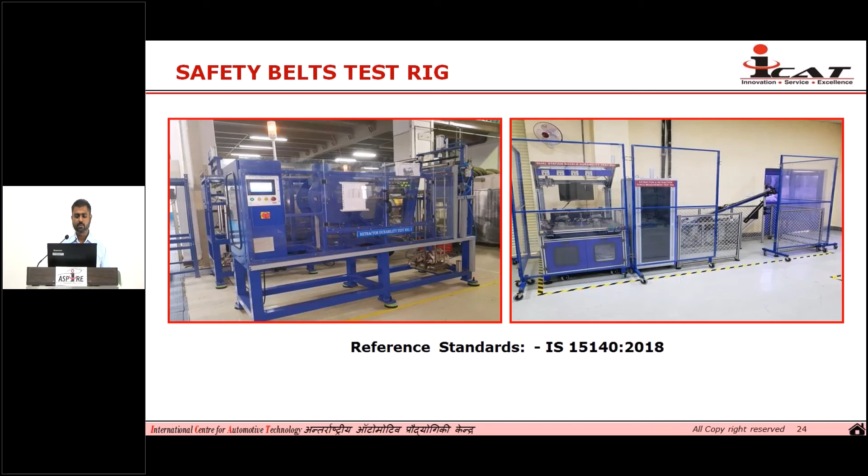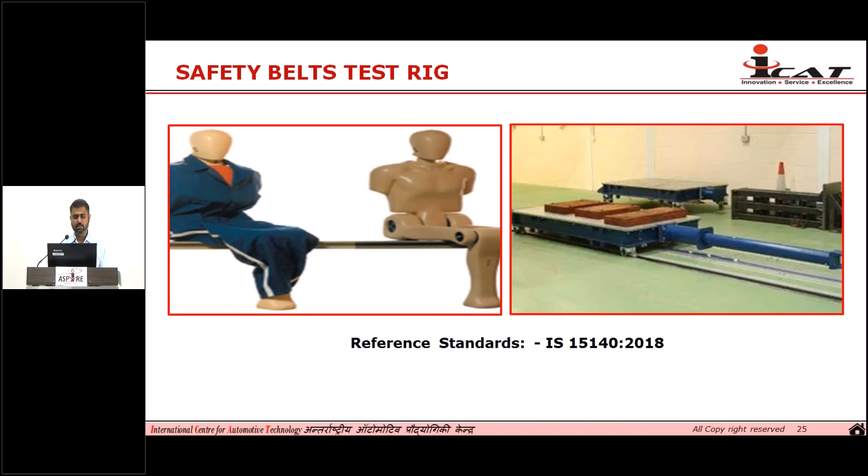And we have sled facility also for dynamic testing. It is available in our another lab, PSL lab, but we are coordinating as a whole. We are coordinating for safety belt so that it is ease for the customer - they have to contact only one person. So I have included the PSL part in this presentation also.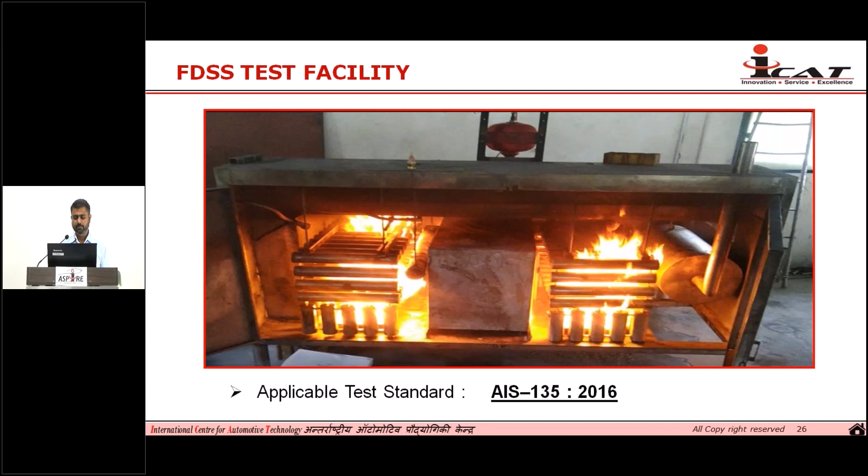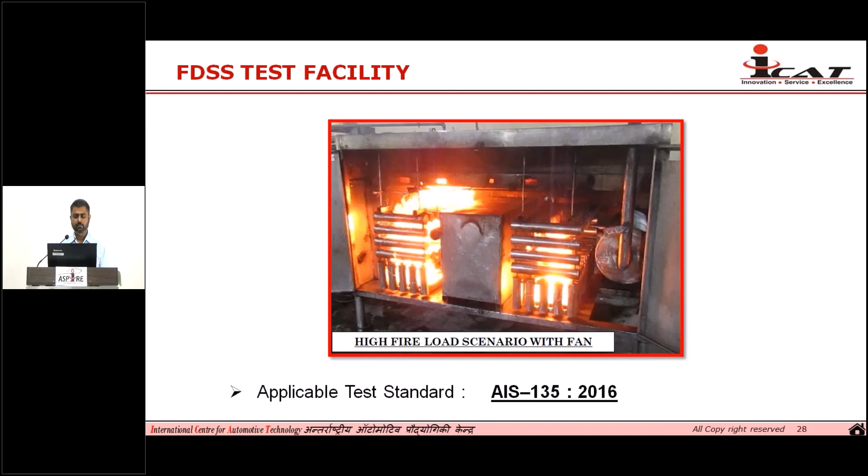There are some 4 scenarios for FDSS testing. This one is for high fire load scenario. This is high fire load scenario with a fan. This is a low fire load scenario. This is the reignition test scenario.

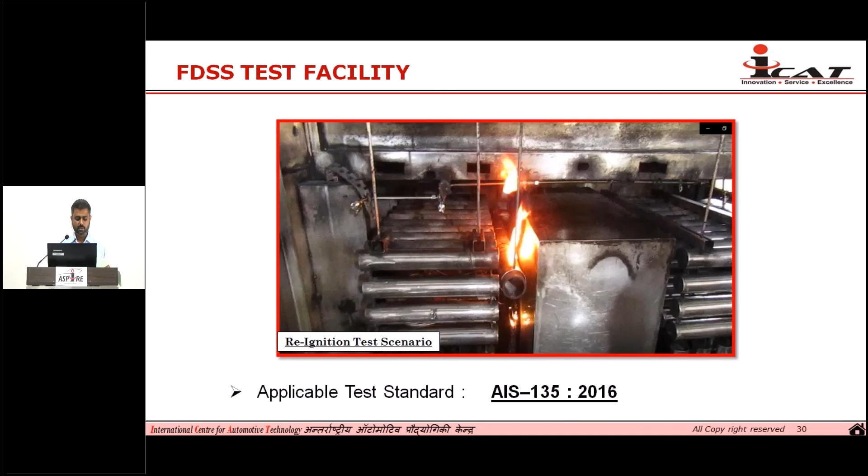This is our another facility, the tilt test platform. With this facility, we can do the rollover testing as per AIS 52 and AIS 31. Our facility has maximum capacity of 50 ton, length of 20 meter and width of 3.5 meter. So with this facility, we can do the rollover testing and stability testing for all types of buses.

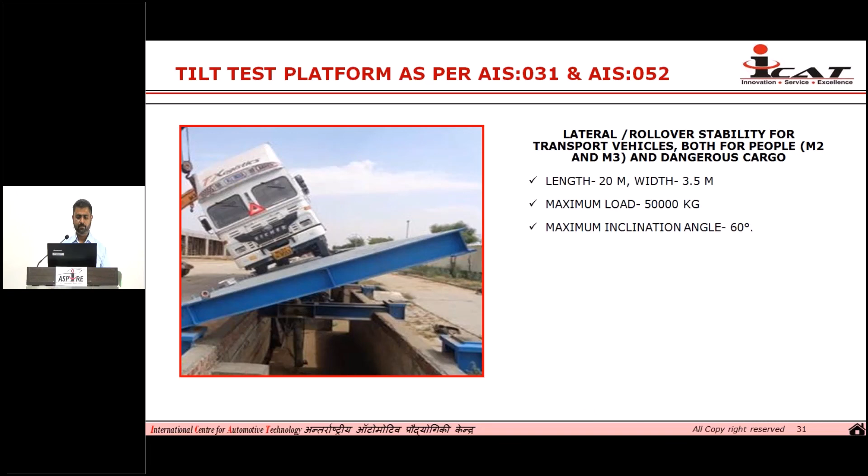This facility is for survival space. Actually, it is not for bus, it is for truck testing. This facility is for front impact test, and the second one is for rear body strength test.

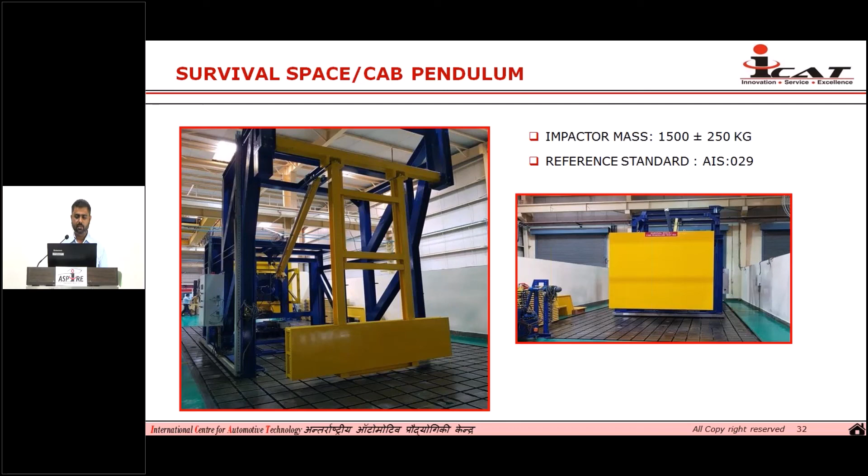This is a window retention test facility, used to test the window of the buses. We can do this testing on the mock-up or inside the passenger cabin. Its capacity is 1000 kg and displacement is 140 mm.

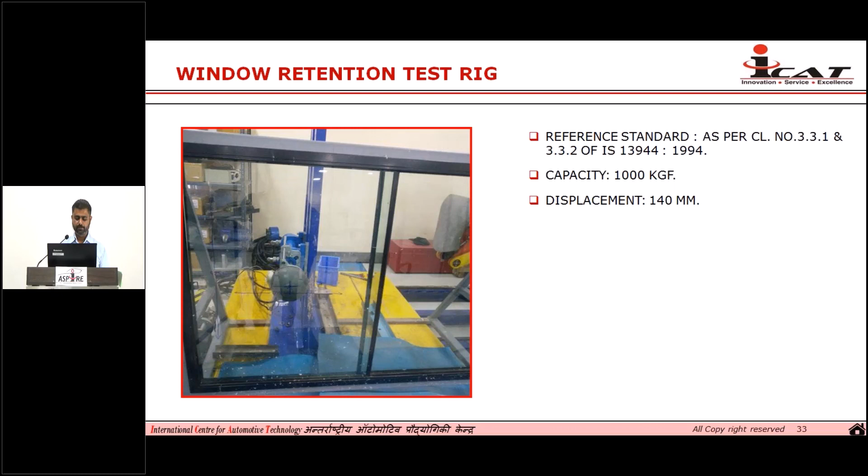This is window frame testing facility. We can do the window frame testing also as per AIS 068/2005 with amendment number 1. We have bus window durability test rig, vibration shaker, salt spray chamber for corrosion testing, ozone chamber, and oven for heat aging testing. We also have UTM for strength test and hardness test facility available. So we can do the complete AIS 068 testing here in ICAT.

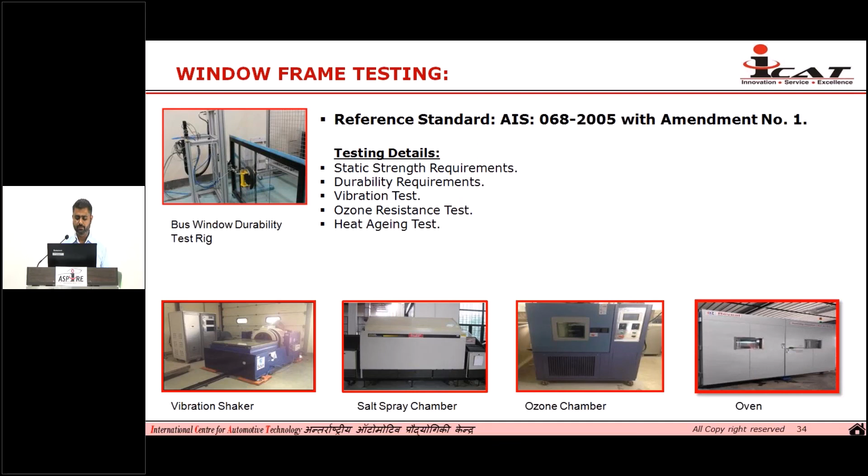So these are the other testing facilities which will be conducted in the component test lab: windscreen wiping area test as per IS 15802 and interior fittings testing as per AIS 047.